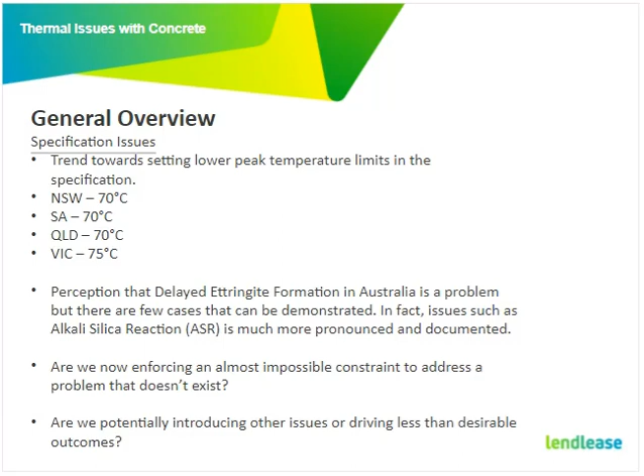If you look at the two notable pieces of research or standards on delayed ettringite formation, in the UK there's the Building Research Establishment paper. They basically documented that any temperatures below 80 degrees will have a low risk of delayed ettringite formation occurring. As you go over 80 degrees it has an increasing risk, but there's also research suggesting that if you've got additives such as fly ash levels above 20% or slag levels above 40%, you can reduce DEF risk up to temperatures of 100 degrees. A lot of our concrete mixes these days have these additives either as a minimum or we apply them. Ciria C660 is another well-known code or guideline, and also suggests that the presence of fly ash in the mix reduces the risk of delayed ettringite formation, and 80 degrees is acceptable for specifications.

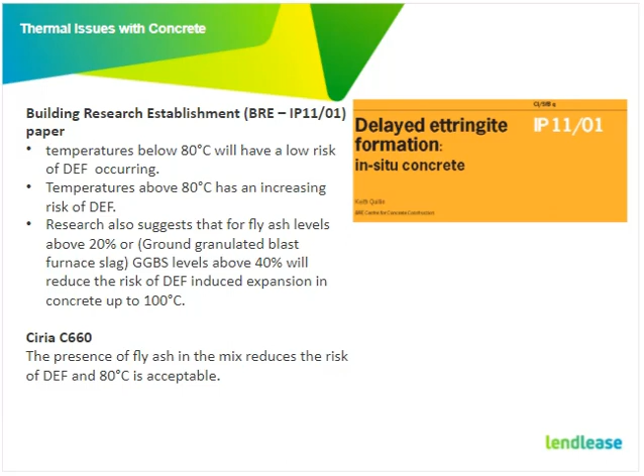There's also a trend towards setting max differential temperature limits. The issues with differential temperature are mostly with cracking, and this is reasonable. However, there's ways to control this, and enforcing too many limits without any flexibility is probably sometimes not the best way to go. I think it should remain open to engineering controls, leaving it a bit more open.

One of the other issues turning up on some of our construct-only contracts: the specifications apply the limitations, but the design doesn't provide all the controls or options to achieve it. Controlling differential temperature, there's multiple ways you can do it, but you don't know the design because it's construct only. So you generally aren't engaging a design consultant in a construct-only contract to deal with these issues, you're basically just pricing a job. So how do you price these requirements?

We do have jobs at the moment where you pour the concrete and differential temperatures exceed limits. You apply some sort of controls, but how do you know that? You're not the designer, so whether that's engagement of the designer during the construction phase, you've already priced the job, so how do you then pay for all these things? That's another issue that's not quite addressed.

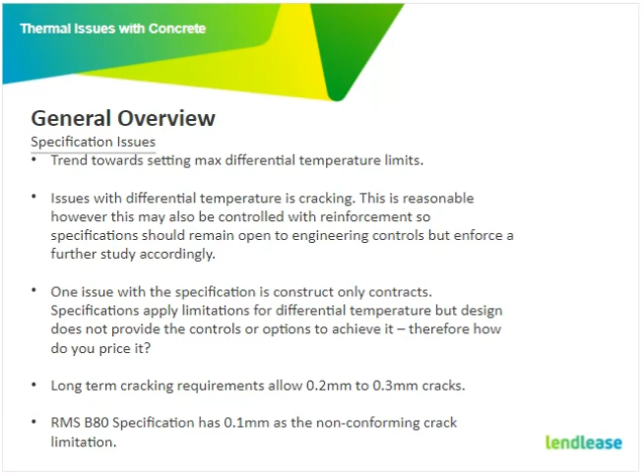One of the other issues we're seeing on projects is a trend towards clients now nominating higher exposure classifications in the SWTC or design criteria. So the last job I was on, it said the minimum exposure classification is to be B2. You do all the environmental assessments and realise it's actually only B1. But there's the perception that providing a B2 or C exposure classification is going to give you the best outcome, and what we're finding is actually that's not really the case.

You're bumping up the cement content, it's more likely to crack, more likely to get hotter. How do you achieve your peak temperatures? You've got all these conflicting requirements, so I just don't think things are well aligned. If you want a higher exposure classification, perhaps in class B2 or C, maybe you should allow for higher peak temperatures and things to be addressed.

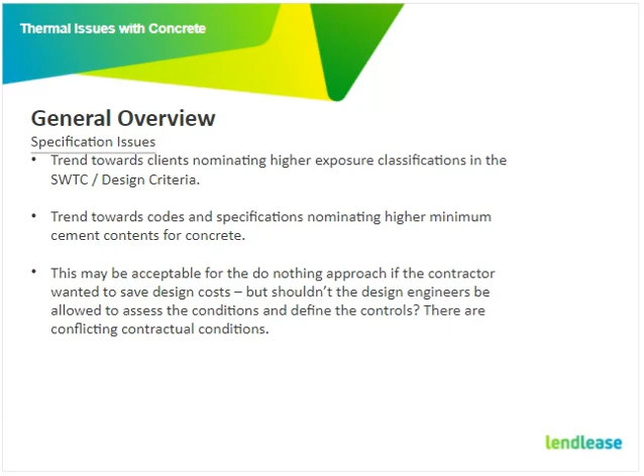So that's just a general overview. I'll probably talk about some of the projects now. Nambucca Heads to Urunga - this is a thick blade pier over the Kalang River. It's 9 metres wide, 2.2 metres thick at the pile caps, 1.9 metres deep. The actual pier component had a width up to 2.5 metres thick. So, massive pour.

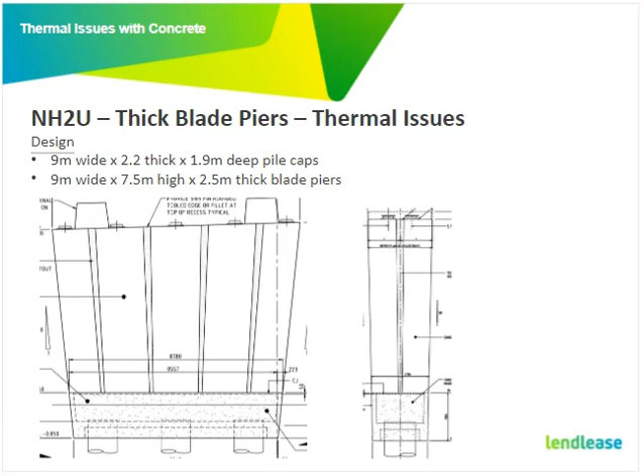Something that's difficult to control. These were the requirements: differential temperature across any face must not exceed 20 degrees. We have to insert thermocouples to monitor.

The other requirements are measures must be taken for the heat of hydration using blended cements, cooling concrete during curing, insulated forms, and the use of large aggregates. Now we did all that, you still don't achieve the peak temperatures, but I'll continue on that. On this project, the peak temperature limit was still 80 degrees, and as I said before, it's been reduced to 70. In this case, I think it'd be almost impossible to achieve.

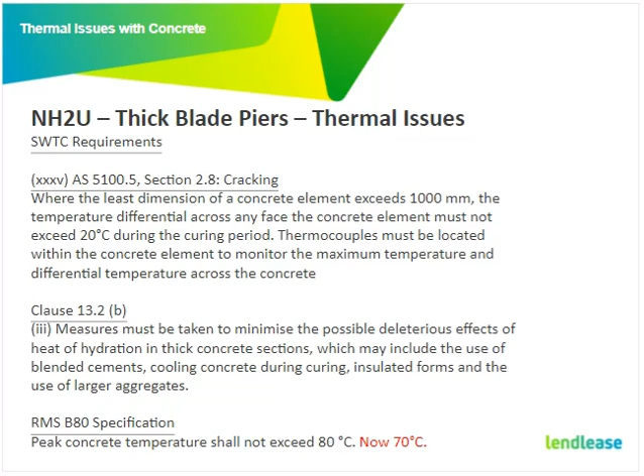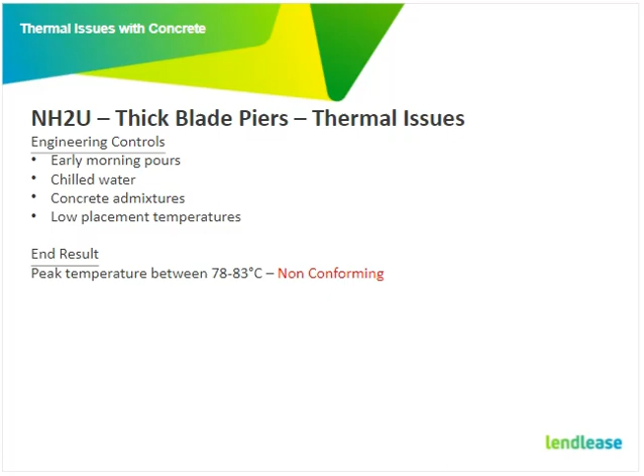What did we do on Nambucca? We had early morning pours, chilled water, concrete admixtures, low placement temperatures, and our end result was 78 to 83 degrees. So essentially, some results were non-conforming because the limit at that time was 80 degrees, but if it was 70 degrees, you'd have no chance. It just wasn't going to work.

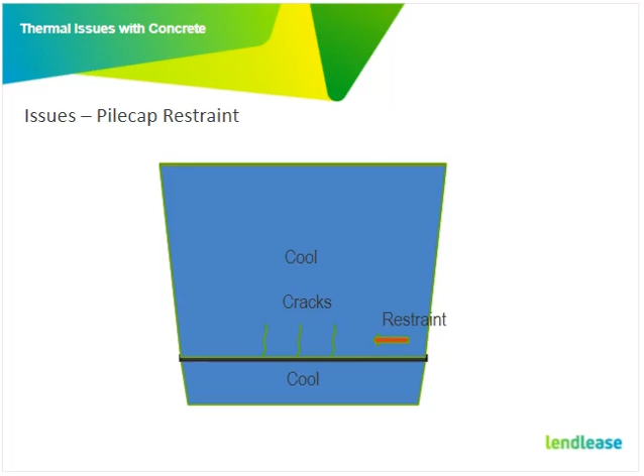So talking about differential temperature here, I suppose I'll just explain the issues that can occur. This is on the same job. You've got a pile cap that you've poured, and then you've gone and put another concrete pour on top. It gets hot. You've got a restraint there, so next it wants to shrink as it cools, and as you can see, that's where you typically see some cracks.

What do we do on this job? We had a requirement to pour the pier quickly after the pile cap, and we also used a higher density of reinforcement at the base. Now that was all modelled up, and we did all the assessments.

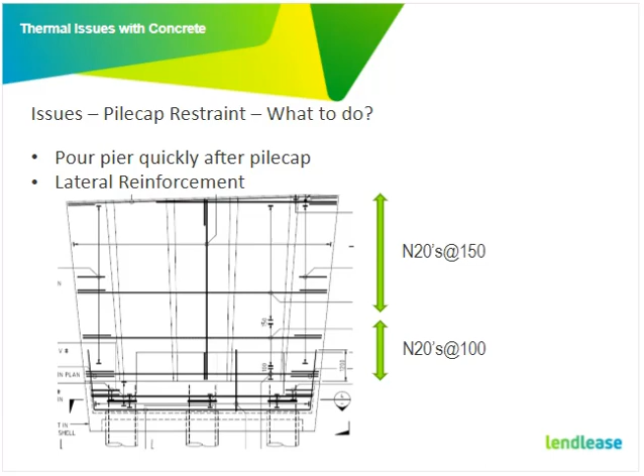But if this was a construct-only contract, how would you have dealt with that? We could only deal with this because it was a D&C. Pouring the pier quickly after the pile cap - how do you place those limits in a spec? It's a bit difficult.

The issue of differential temperature is, the inside is hot, but then you have issues with the ambient temperature or wind, particularly which is pretty damaging, which basically cools the outside surface. So you get quite a large differential - if you've got 80 degrees in the centre, you get quite a large differential to the outer edge, and that's what causes cracks from differential temperature. Now that is a real... well, I wouldn't say issue, but it's a real effect.

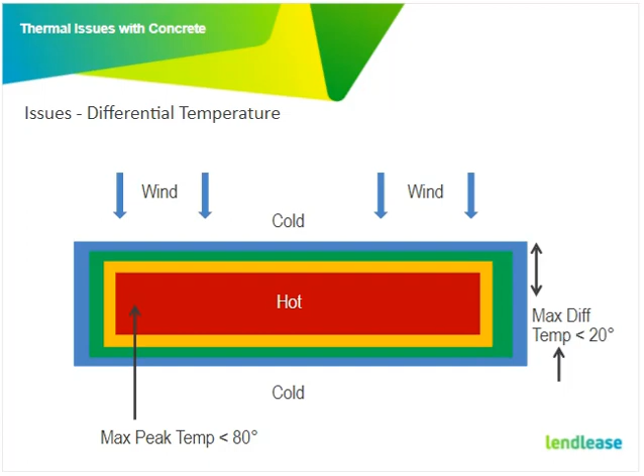So what did we do on this job? I think you can see that picture there. It's not - sorry, I'll bring it up. We used insulated forms. And the other thing we did is that basically on this job we wanted to strip our forms quickly. Most contractors want to do that - pour your concrete, strip your form, move on quickly.

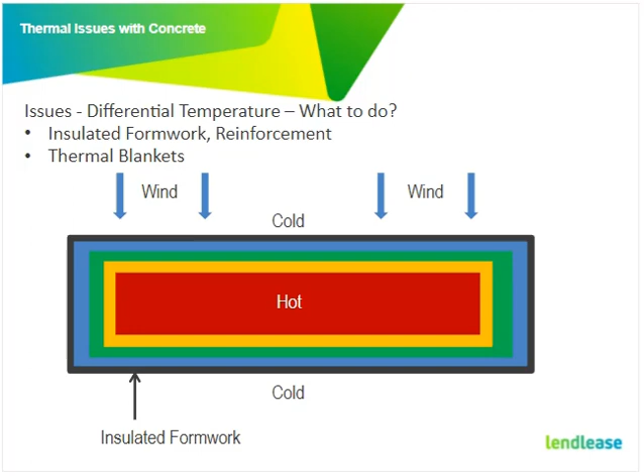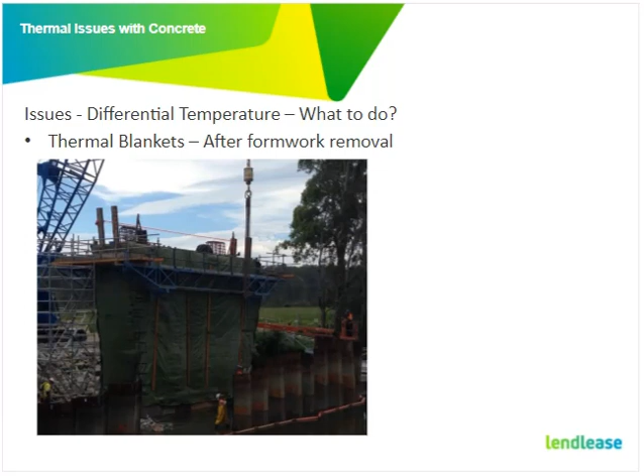So what we did in this case is that once we stripped the form, we quickly put on a thermal blanket. These are actually pretty cheap to do. I think this one was made up with a bit of camping material and some of that insulating foam, like a Softlon or something like that. It's pretty cheap sort of stuff, but very effective.

So, moving to the next slide. This is the temperature graph for one of the pours, the first pour that we did. As you can see, at the top we exceeded the 80 degree limitation.

That was probably mostly because our pouring temperature was above 26 degrees. So if you reduce your placement temperature by one degree, the ratio typically to your peak temperature is a 1-to-1 reduction. It's typically a 1-to-1 ratio.

I also want to draw your attention to the green line on the right. That's the differential temperature. As you can see, we had the insulated forms on and it was very well controlled. At that point we stripped the form, and one of the issues we had is we couldn't get that blanket on quick enough, just due to the construction methodology.

It was the first one. They had a few stuff-ups that didn't quite fit, and it took them a little bit longer to get it on. As you can see, the differential temperature with the outside face just started to cool from the wind and other things, and that crept up, giving us a non-conforming differential temperature. The result of that is we ended up with some cracking.

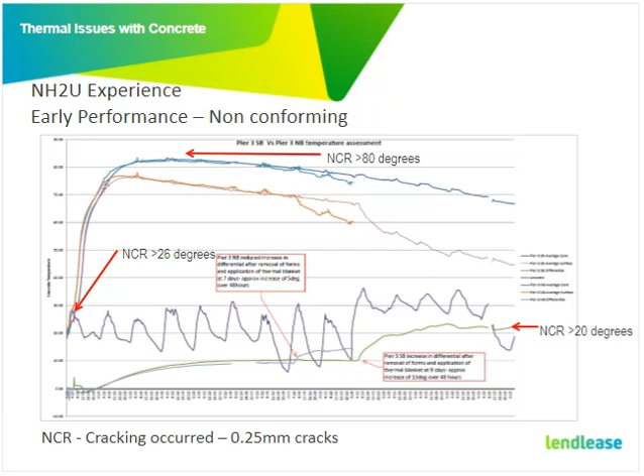The next pour, we got it right. As you can see, the placement temp was less than 26 degrees, so we managed to get under the 80 degree limit. Again, on the far right, you can see where we stripped the form, and we got the blanket on quickly, so it was just a slight increase. The differential temperature there was only 12 degrees, so it was very well controlled, and those thermal blankets were very effective.

And the end result is no non-conforming cracks. So it is effective.

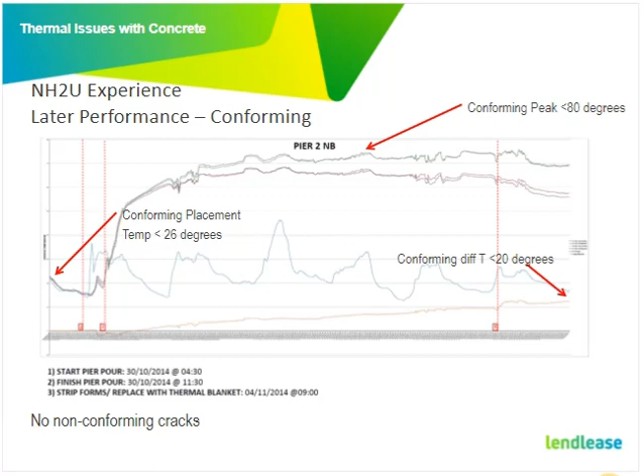I'm going to talk about the Oxley Highway to Kundabung experience. The main issue there was that we had the 70-degree peak temperature limit imposed. This was the first job that we had with this limitation.

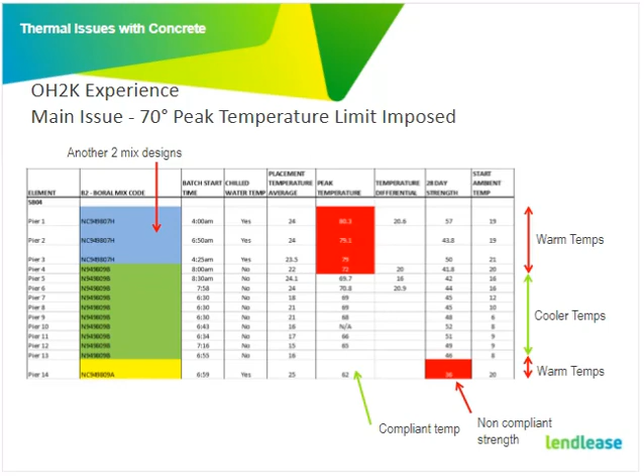So how can you say that's a quality outcome? Look at what was forced, look at the way we were forced to start with one mix that didn't comply with the peak temperature, then another mix - where's the consistency there? There just isn't. These are the behaviours we're driving based on peak temperature with mixes that have fly ash and slag in them, for an issue that isn't really even going to exist. It's just not driving the right behaviours, and I think that's kind of wrong in the industry.

The only time we managed to achieve the peak temperature limits was when it got to the winter months, again with another 2 mix designs. We couldn't achieve it in the warmer months - it was only achievable in the cooler temps.

But going back to this slide, going back to this mix here, we dumped a whole lot of slag into the mix. Now what that does is it slows down the chemical reactions a bit, and I suppose people in this room will be able to explain things better to me, but it does reduce your peak temperatures.

But what you end up with is a reduction in the 28-day compressive strength. So there's one way to control peak temperature, but then you've just got another non-conformance. You're just chasing your tail.

I know in South Australia there are issues with putting slag in the mix because it adjusts - it's not the sorptivity, but I think it's the permeability sort of ratios or something. So again, you're putting slag in the mix and then dealing with another issue.

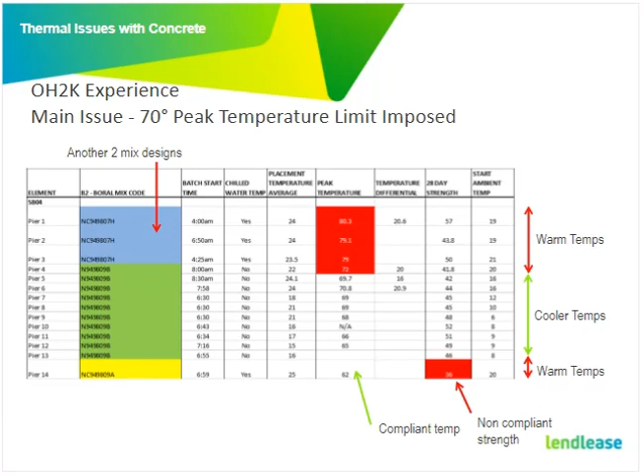Basically, you just don't have much of a window to get through. So on Richmond River Bridge, after all the heartache that we had, we wrote a discussion paper and managed to get a relaxation of 75 degrees. So if you're on projects, I recommend trying your best to get some sort of relaxation. The deal was NCR, but still recorded as accepted as is. So at the end of the day, you've got all the documentation, and you can monitor things in the future if need be.

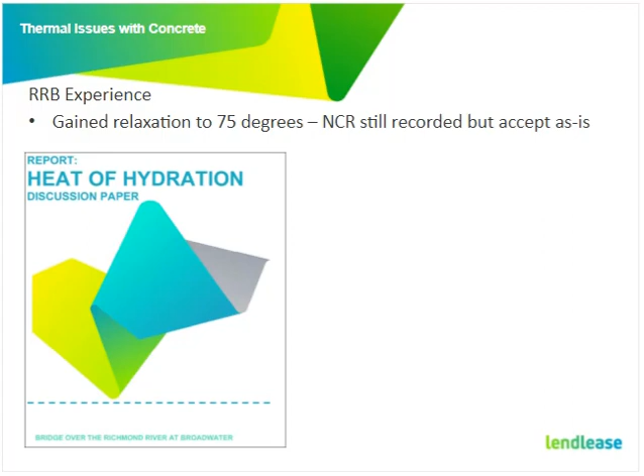What are some of the engineering controls you can use for peak temperature? Get a relaxation to 75 degrees, reduce your least concrete dimension - that's another one of those things that has a direct impact on peak temperature. You could add internal voids, or as I explained before, reduce the pouring temperature. If you can get that right down, that's a good thing.

I think one of the issues we have in our job in KSD in Queensland is we're having to actually pump concrete by 1 or 2 kilometres or something, and by the time it goes through and picks up all the friction, it increases its temperature by about 5 degrees. So whatever you pour into the pump at, at the other end it's another 5 degrees hotter, and then again you can't meet these peak temperature requirements.

So it's quite difficult. Early morning pours - this is one for the concrete suppliers. Getting those aggregates in the shade, chilled water, ice. I know on the batch plant on Nambucca we started insulating the storage tank for the water and things like that, which definitely helped a bit. All these little things, just to get a little 1 degree here, 1 degree there - it does all help, but it's not easy.

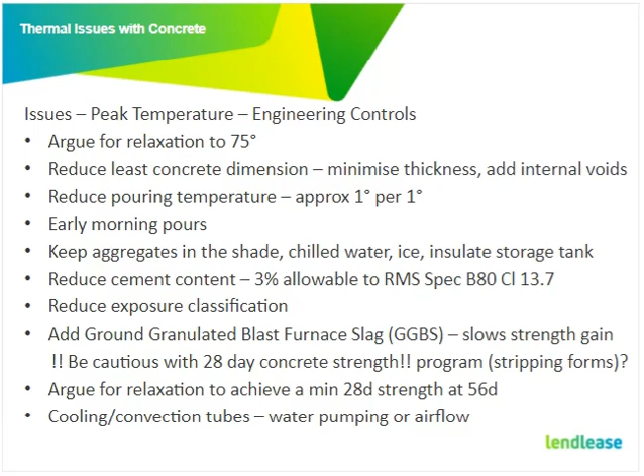So on Richmond River Bridge, during the design, we did a lot of modelling. We used CIRIA C660. Now, that can actually be applied quite poorly, I've noticed, in the industry - I think you've really got to be experienced and know how to model those things. In CIRIA C660 there's a lot of errors that get made that I see in the industry, so just be cautious of that. We went to the extent of using Midas, using finite element models to do the thermal modelling.

30% fly ash or 65% slag - we had a couple of options there. We got rid of the requirement to monitor in piles. Now that's another important one. I know on Grafton Bridge they're having a lot of problems up there trying to get their temperature down - they've got those 3 metre diameter piles. So what do you do?

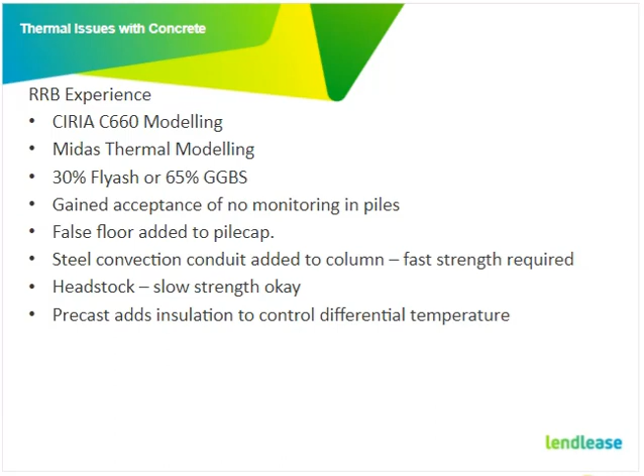So some of the other things, I'll probably talk about what we used on Richmond River Bridge that helped us as well. These are our pile caps. If you can sort of see what we have here, we had a precast shell that you just applied directly over the top of the pile. Typically your pile cap needs to go to the depth where we've got the soffit there, but what we did was create that as a false floor, so we reduced the thickness of it. That definitely helped us significantly to control the peak temperatures. And the other benefit is you've got a shell that automatically insulates that face of the concrete, so you don't have any differential temperature issues resulting from that.

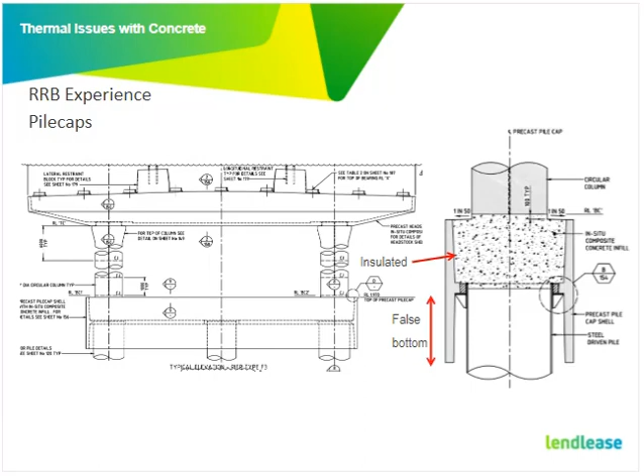Yeah, so a false bottom, insulated.

On the pile caps, we were forced to use exposure classification C. The actual assessment was B1. Once you did the assessment of the actual concrete on the inside, the shell was C - that's fine, easy enough to do in the precast yard. But with that big thick concrete pour, it was actually B1, fully protected. There should have been no reason why we shouldn't have been able to use it, but we used Class C.

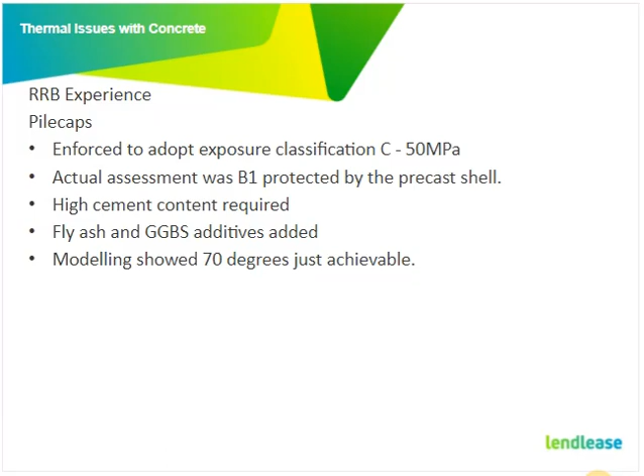High amount of cement content, we had all the additives. The modelling showed 70 degrees was just achievable. So in this case we do show that we did exceed the 70-degree limit. With all those controls applied, you still can't meet it.

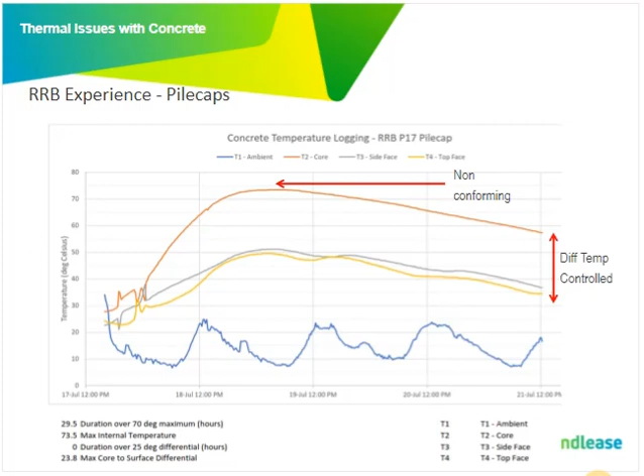Non-conforming. But differential temperature was controlled.

In the columns, one of the things we did during the design was insert a steel conduit into the centre - basically just a 60mm conduit into the centre. It's hard to tell from this graph, but what that did was change the peak temperature location, not at the centre, but a third of the way from the centre to the surface.

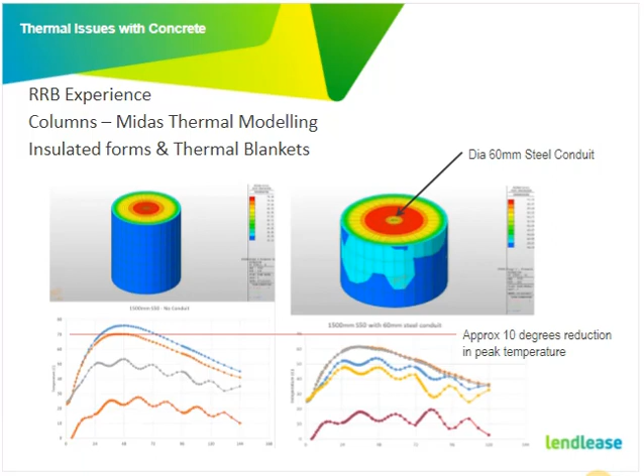On site, after we'd done the pour, you could actually feel the heat coming out of the centre of the tube as the concrete was curing. We got about a 10-degree reduction in peak temperature from doing that, and we managed to achieve compliance for all our columns, which was a good outcome.

This is another sort of innovation we came up with - a precast headstock shell. You just drop this straight onto the columns, pour the infill. You can see the section there - as you can see, fully insulated around.

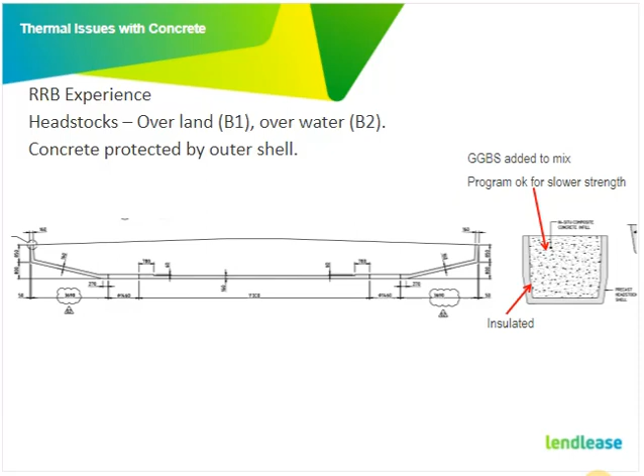On land it was B1 exposure. We were forced to use B2 over the river component. It was okay for program because we didn't need the strength gain, we didn't need to strip the form, so it was not an issue to have slag in the mix.

Overland, generally the peak temperatures - this was a B1 mix - were in the 70 to 75 degrees, so we didn't meet the 70-degree limit, but we managed to write a whole bunch of non-conformance reports anyway. As you can see, differential temperature was controlled because you've got that shell - the shells are pretty effective.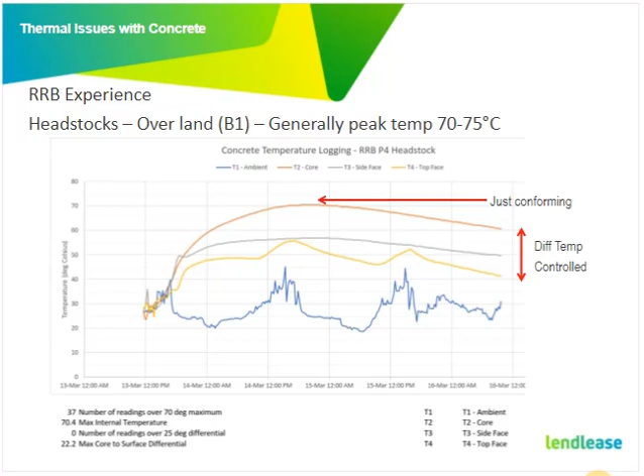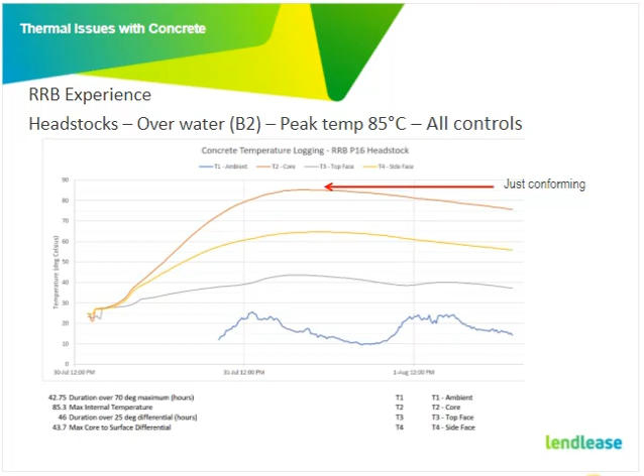Over the water, even with all those additives applied, it was a B2 mix. We had instances where we ended up with up to 85 degrees, so that was not ideal. But it just shows you apply all these controls - how on earth we were ever going to achieve 70 degrees, I do not know.

Concluding remarks on peak temperature: I would suggest that 70 degrees is okay as your standard specification requirement, and adopt the advice from Series C660, such as if you have fly ash or slag in the mix, there could be a relaxation to 80 degrees. I still think you need some downward pressure on the contractor, and the condition to write an NCR so in future you can monitor the effects of delayed ettringite formation.

On differential temperature, I think the limitations are okay, but I would only say allow some flexibility to undertake modelling and apply engineering controls. Just having a blanket 'can't do anything' approach is not the way to go. We came up with some engineering controls, but reinforcement is also another way to control it - you might want that flexibility to have a quick program.

Thermal modelling - I support doing it during the design phase. It gives you a better understanding and assesses the options to apply your controls. You can run a few options and might be able to save a bit of money and a bit of program, so I support that.

On exposure classifications and the durability assessment: my view is we're required to do it in the design phase, in the D&C design phase. You're required to do a durability assessment, but then you're not allowed to define your own exposure classifications for those already set - there's a conflict there. I believe engineers should be allowed to do their work, instead of just adopting higher exposure classifications for the sake of it. We've got a design life of 100 years - define the environment, do your testing. We should be able to do that.